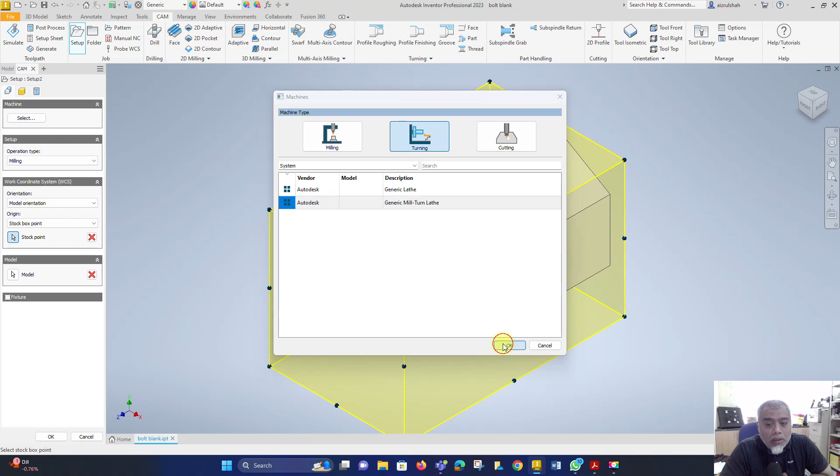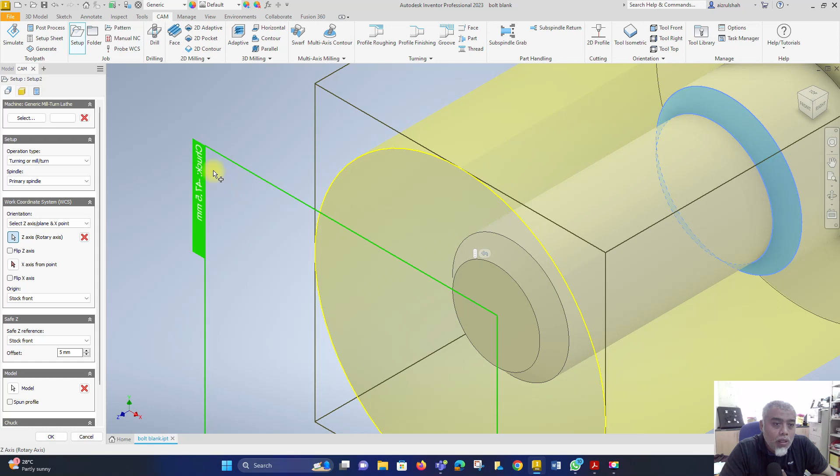Right. Bila kita ambil tu, automatically tadi kita punya stock yang warna kuning ni adalah stock, change from box type to cylinder type. Alright. And then we notice that our 3D triad, the compass, is at the back of the workpiece. So we need to move the 3D triad from behind the workpiece to the front. And then one more thing that we notice, you can notice that in the green box there is the chuck. So the chuck is supposed to be at the back.

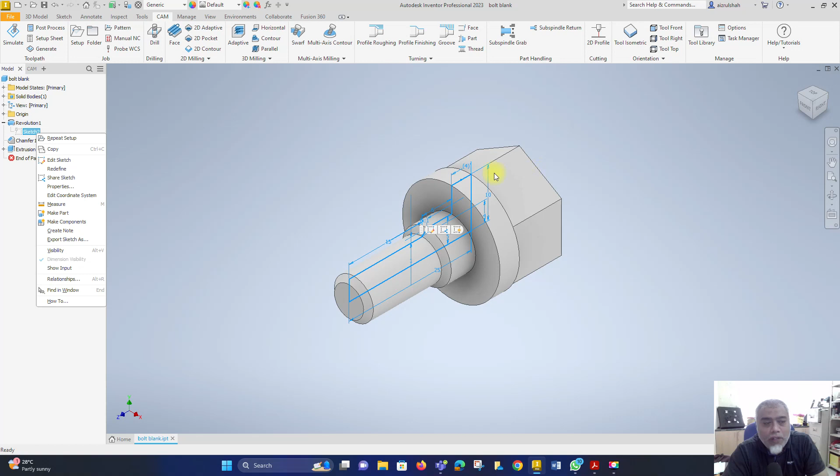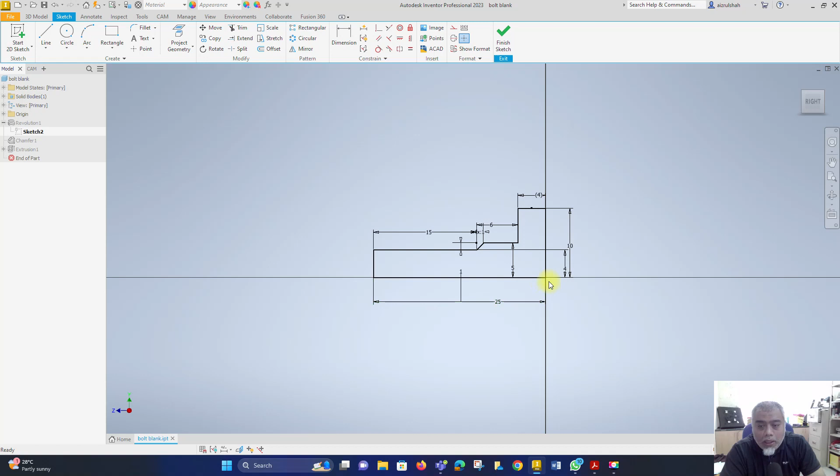So previously in the Inventor 3D model, model section, we look at the first sketch. Why does Inventor detect the back of the model as its front? Because of the datum we choose. If I start the sketch from here to the back, automatically Inventor will detect this is the front. So because I chose to draw in the second section, first, second, third, fourth, Inventor detects the back of the model as the front.

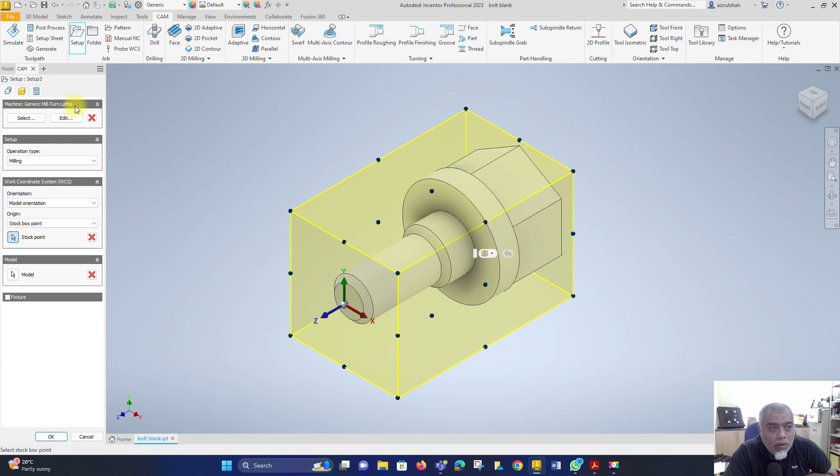Alright, back to the setup. See what I mentioned earlier? Even though we select the machine generic Mill-Turn lathe, the setup operation still remains milling. So change back to Mill-Turn. And then the 3D triad is auto detected to the center, we just need to move it to the front. So how? In the work coordinate system, WCS, in the orientation, the axis where the 3D triad is positioned is already selected. What we need to do is just click flip Z axis.

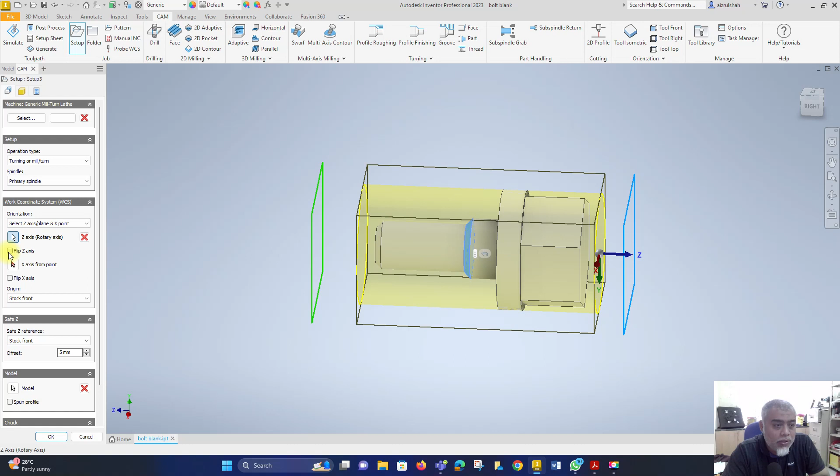When we check flip Z axis, the position of the 3D triad will move to the front. I show you now. See, when I select flip Z axis, the 3D triad automatically went to the front, and the safe Z will follow the 3D triad, and the chuck will go behind. Alright, so don't change the safe Z offset, just follow it. And then for the chuck, don't change anything on the chuck setup.

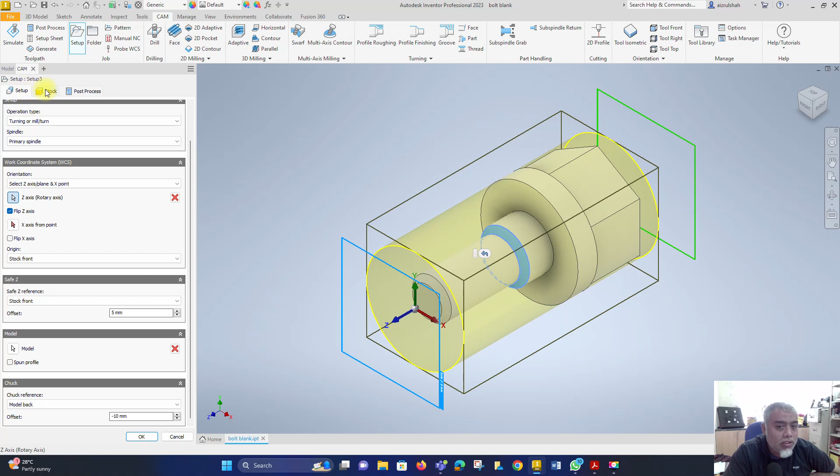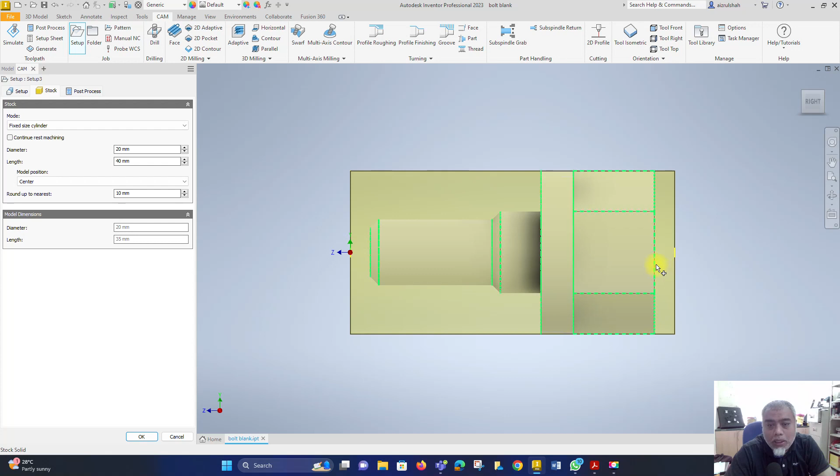Alright, so let me change the view. And then what we're going to do is, normally the distance from our model to the stock here is 5 mm. Usually it's 5 mm. And the back is also 5. And then what we need to change is the diameter. So we need to add another 5 mm. So just put in 25.

Model position is center. Okay, possible, boleh. Total length of the stock is 40 mm. Also possible. If not we can choose, no, just take 40 and then click OK.

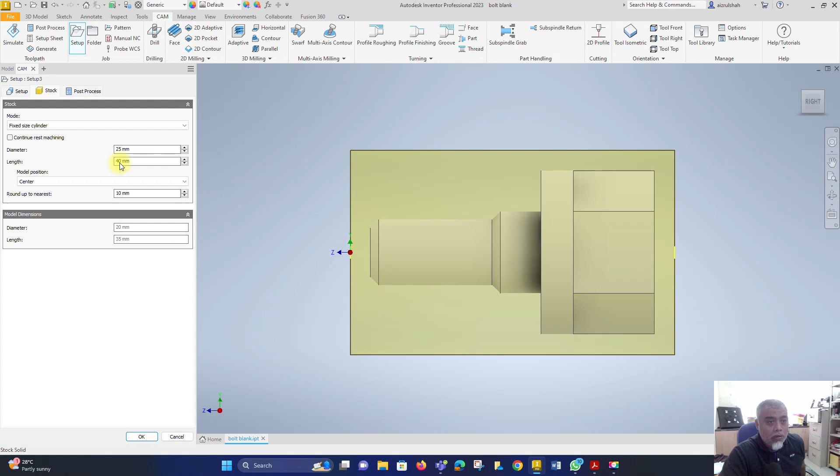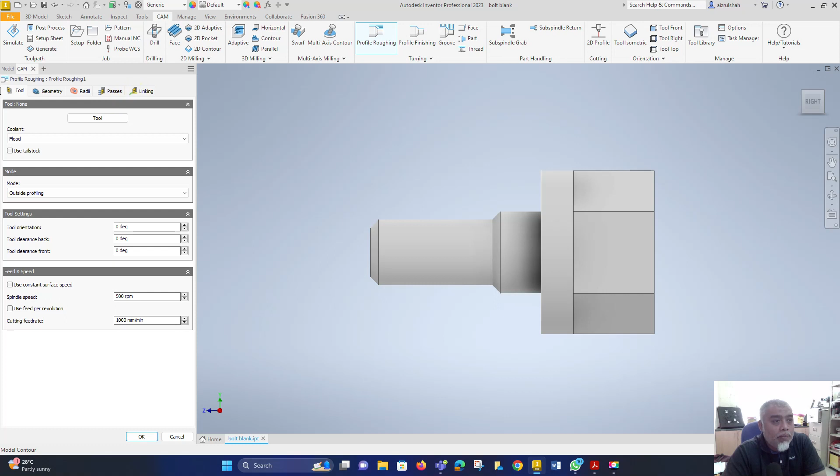Okay, so our setup is done. The first process we need to do is profile roughing. Click on the profile roughing icon.

Click on the tool button, and a new dialog box will come out. Scroll down on the top left dialog box to search for the turning sample. The first tool we're going to use is the top one: CNMT T308 CNMT right hand.

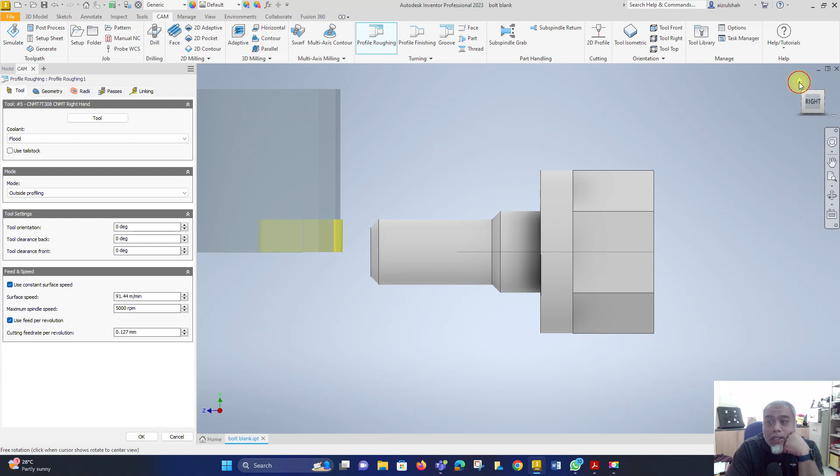We can double click or select and click select at the bottom. When we're done selecting the tools, the tool sample will automatically pop out in the display.

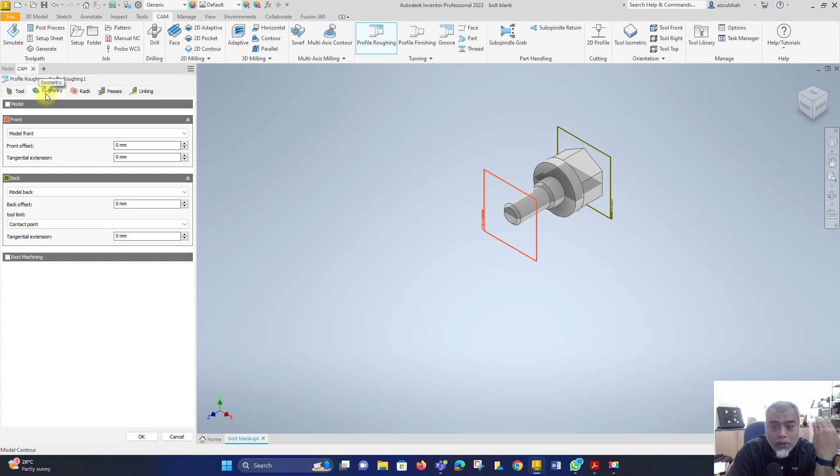Don't change anything else in the dialog box. Just select tools and then click on geometry. Don't change anything on geometry. Radii, don't change anything. Passes, still don't change anything. Linking also. So under profile roughing, what we need to do first is use what the inventor gives. After all processes are done, later on we can tweak the process. Click OK.

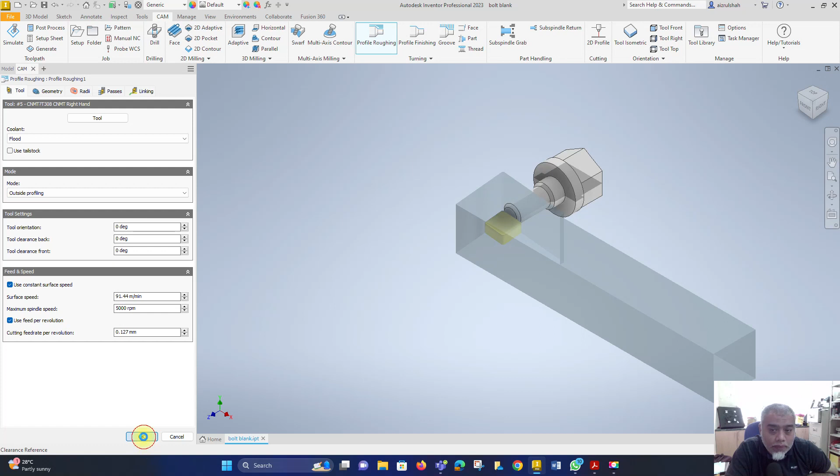Inventor will provide the toolpath. But what you'll notice is, as you can see here, the inventor automatically machines out a groove over here. We don't need this. What we need is for inventor to cut a straight line, following straight over here, not this recess.

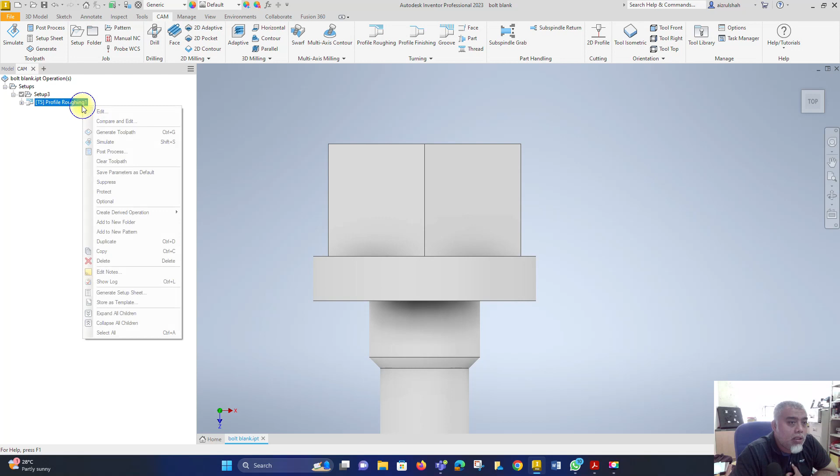So how do we solve this recess? Click edit back, go into the profile roughing, click edit, and then go to passes. In the passes tab, go to cycle and direction, to the grooving function. Allow radial grooving - change that to don't allow. Click OK.

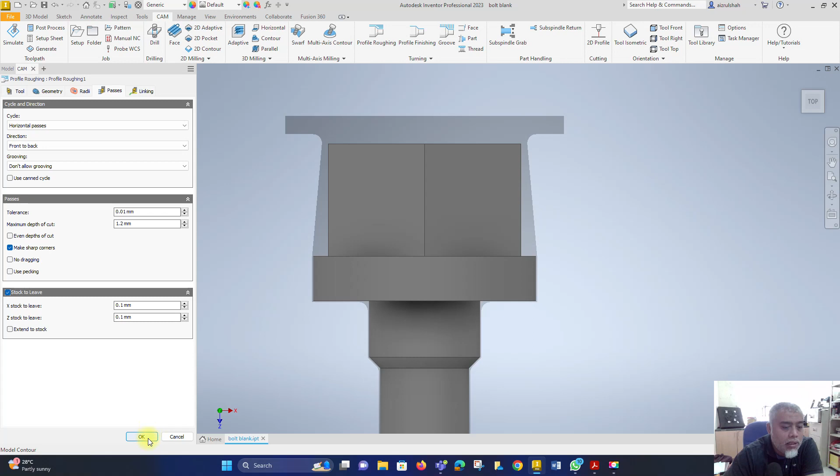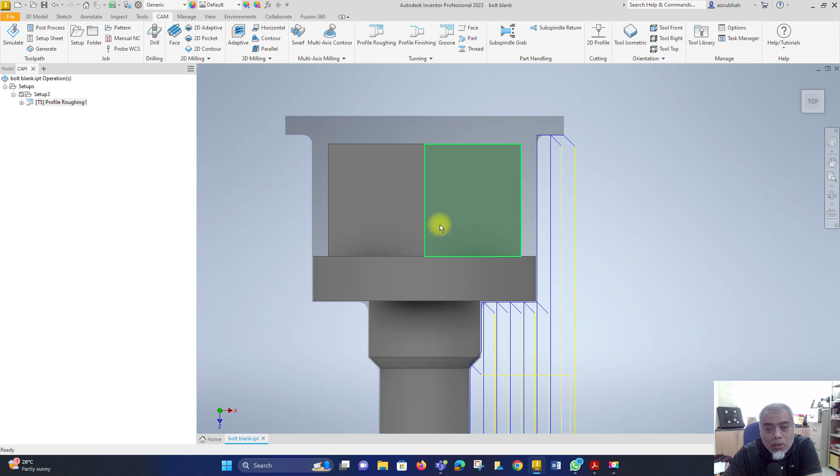See? Previously, inventor gave a recess cut here. When we don't allow grooving, the cut is a straight line. Why do we want to do this? Because later on this polygon will be made with the milling process. So if we're satisfied with inventor's suggestion, we go to the next process.

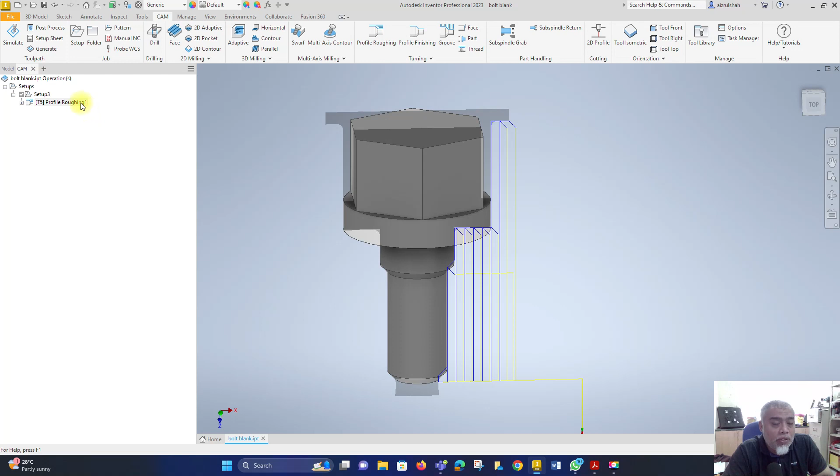After profile roughing - in Malay, profile roughing is 'potong kasar', rough cutting - we need to clean up the surface, so we choose profile finish. First step is we need to change tool.

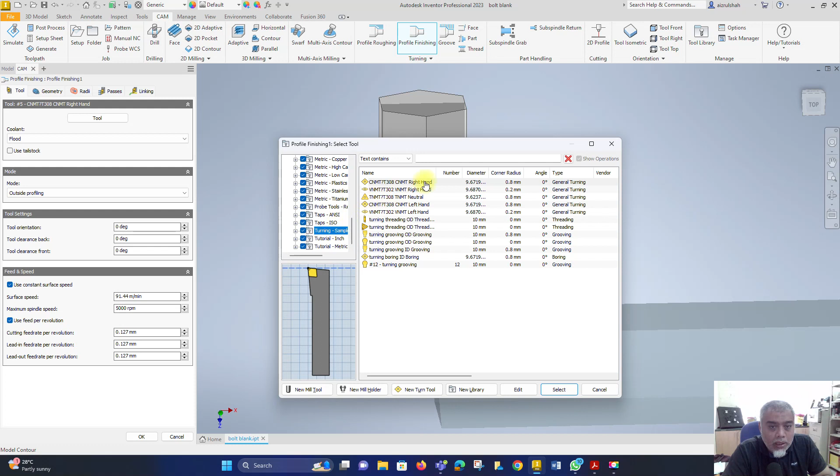Click tool. On the top left dialog box, search for the turning sample. In the turning sample, we take the second cutting tool. We are using VNMT, right hand. Select it - you can double click it, or highlight and click select.

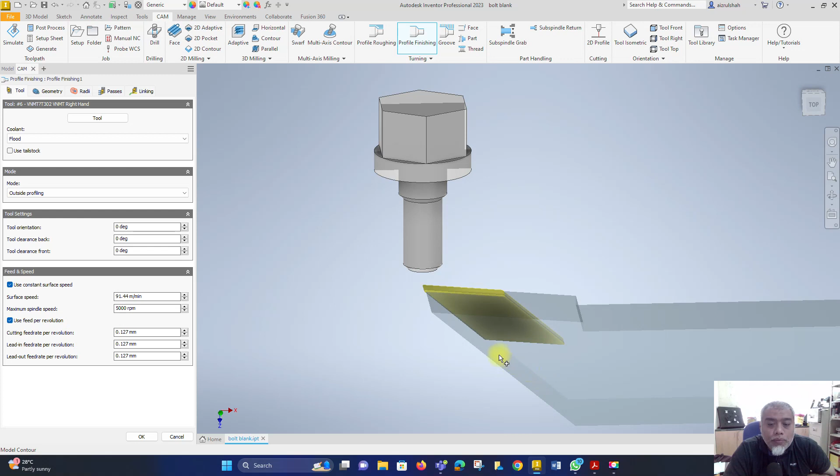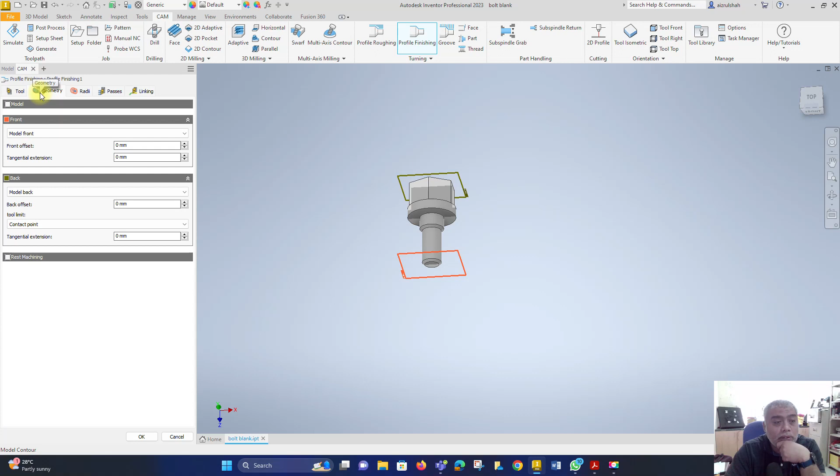After selection, the tool will pop up into the display. What we need to do is don't change anything else under here. Don't change anything on geometry. Don't change anything on radii. What we need to do is at the passes tab.

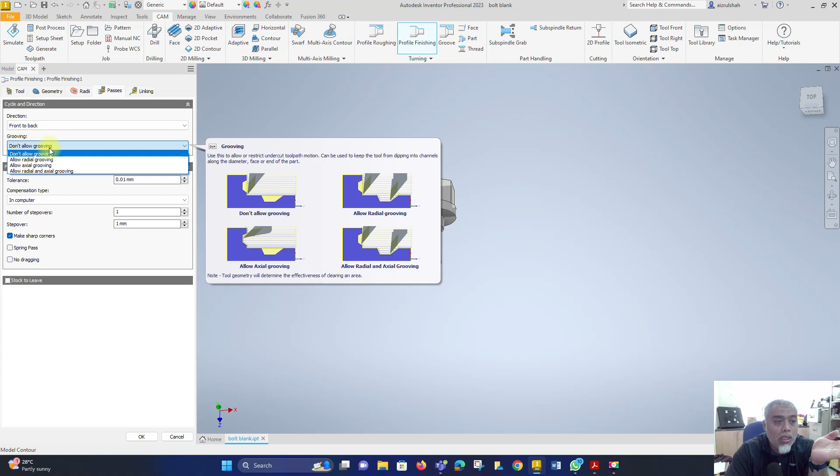We need to change grooving, from allow radial grooving to don't allow grooving. Because in the previous process, when we choose the allow radial process, at the back of the workpiece inventor will automatically give a process that cuts a recess into the side at the back of the workpiece. Don't allow, click OK.

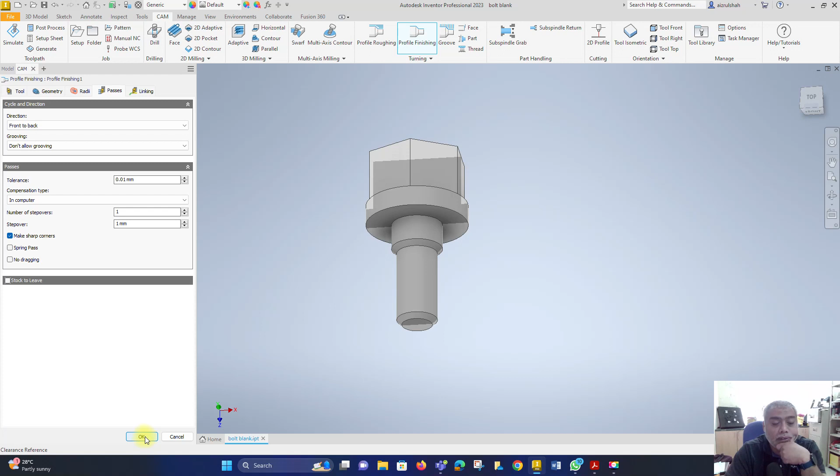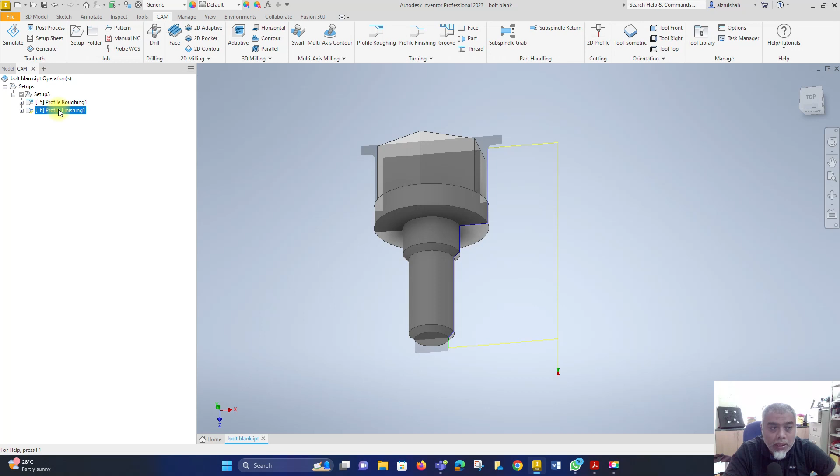See, the cut is straight - the tool path is straight. Alright, I noticed that I skipped one process: facing. So it's okay, after finishing. Before we start anything else, we need to put a face operation.

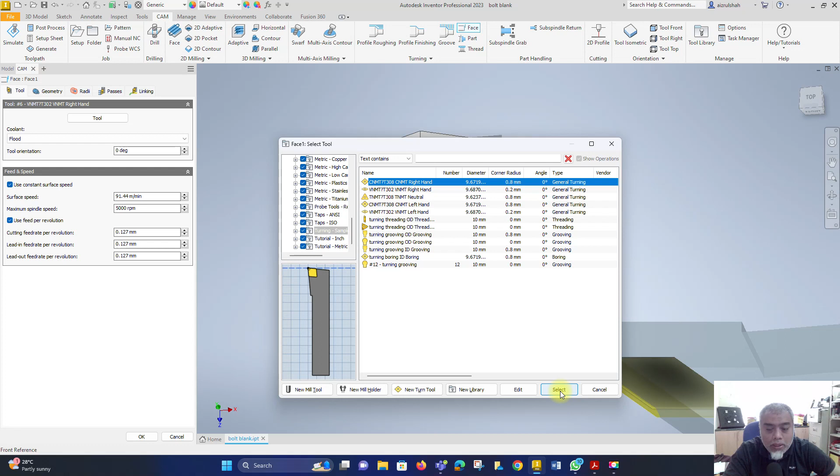Change tool, same thing. Go to turning sample, take the first cutting tool, click select. It will cut the front.

What we need to do is passes - we need to click multiple passes. So we put the step over, we take 2 mm. Click OK. Don't change anything else. We just need to change tool type and passes. Click OK.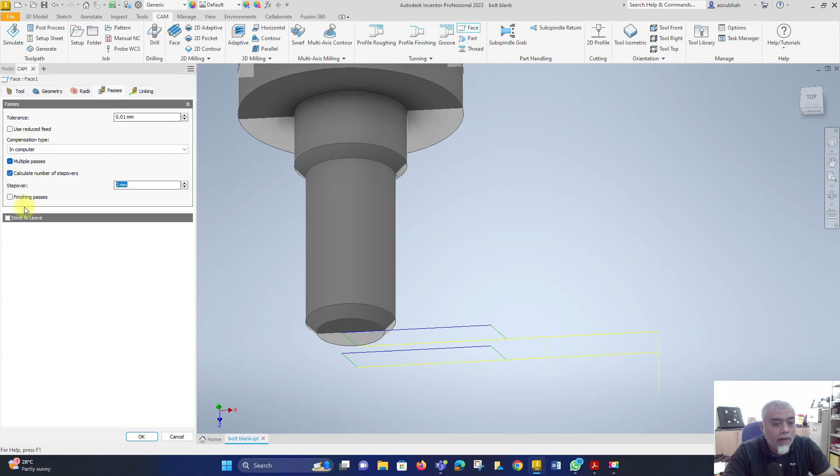So what we need to do is click and hold to move the process up. See?

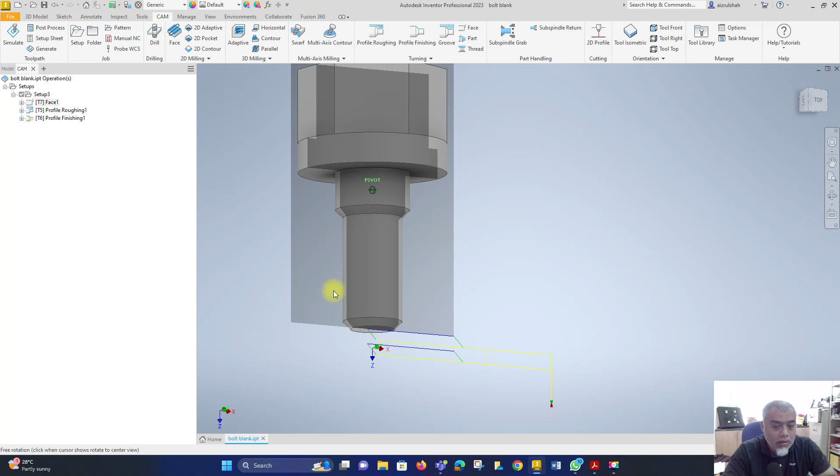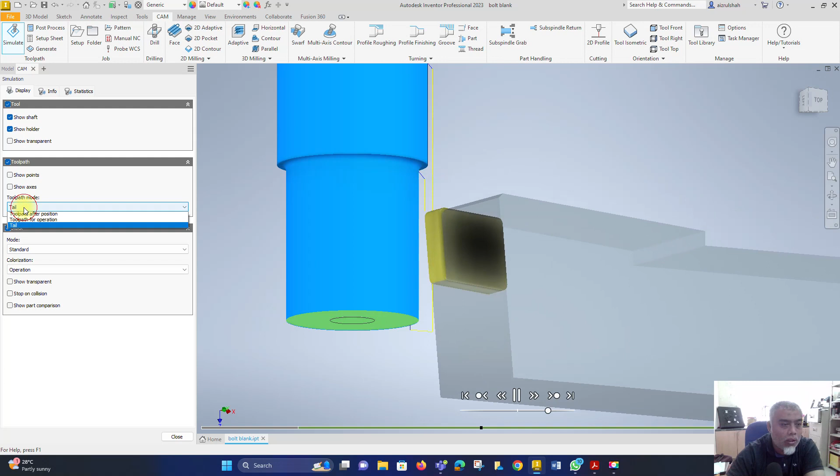After all of this, what we need to do is simulate. On stock, change the path mode to 'tail' or 'for operation'. Double check on the timeline so there is no red line - everything is nice.

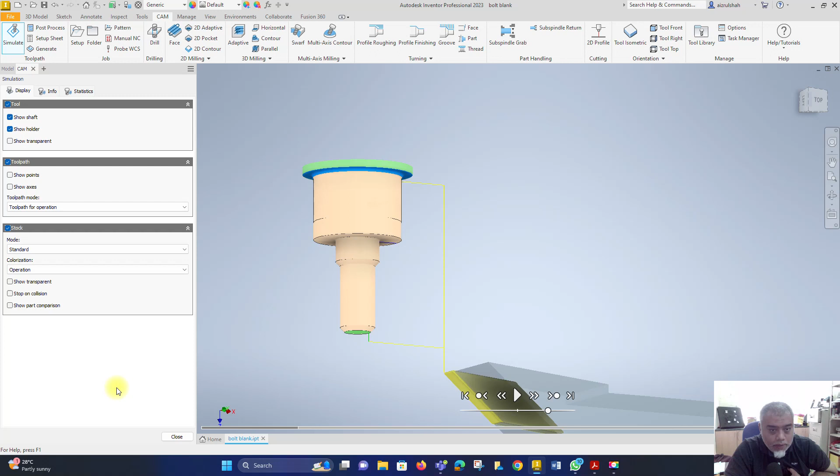Oh, forgot, sorry. Before I end this, what we need to do is click on post process.

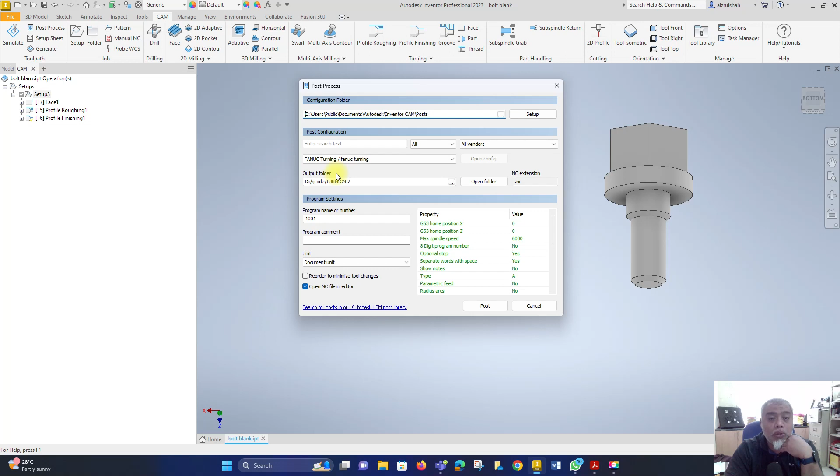Make sure you know where the program went, what your output folder is. Click post. Rename the program with your favorite number. Click save. This is HSM, Autodesk HSM edit will open.

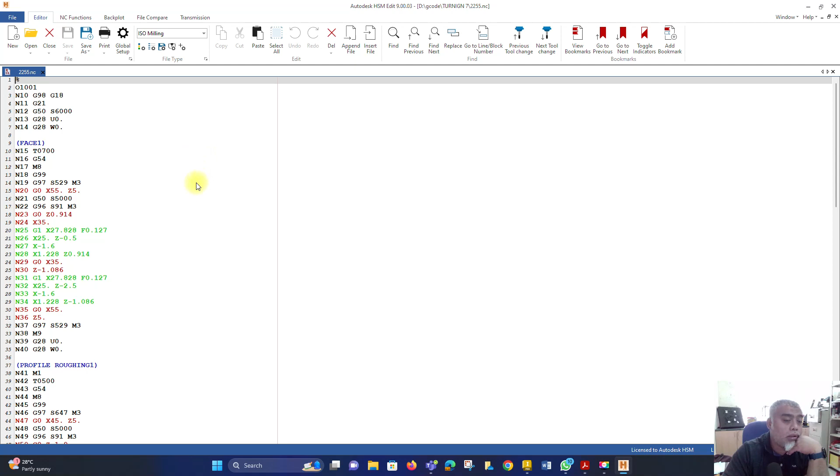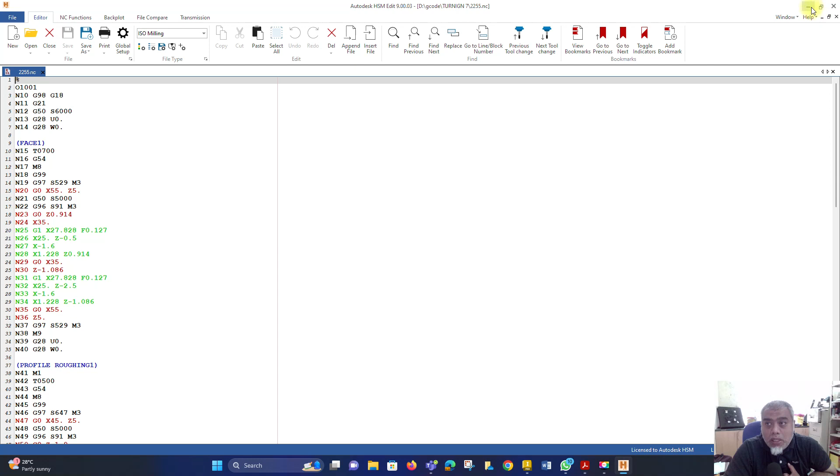So here it will list out your NC program. To complete the task, the things you need to submit are: the NC program, and the other one is the setup sheet.

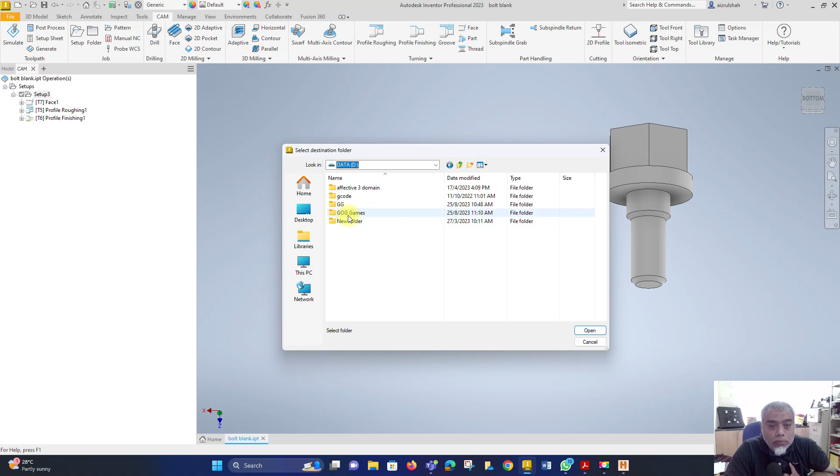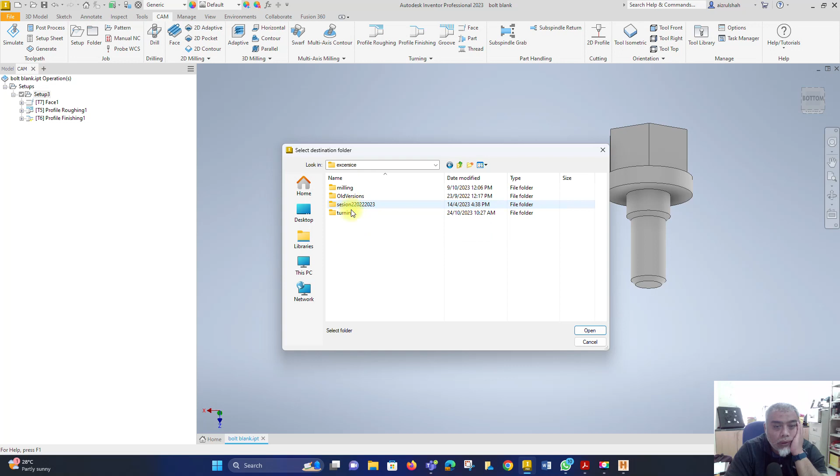Find the folder that you can open and remember. Okay, here - this is the setup sheet for the process.